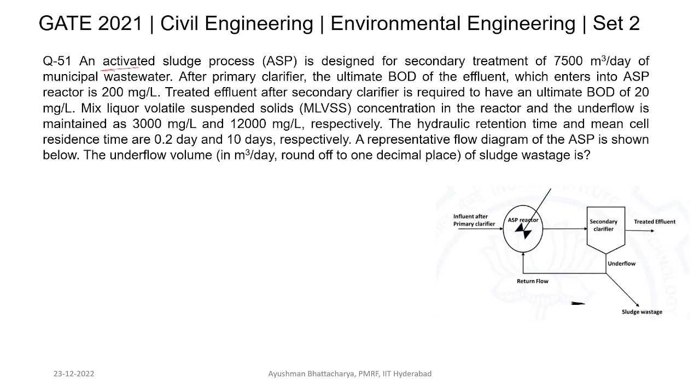In this session, our first question will be from GATE 2021, set 2. The question says: an activated sludge process designed for secondary treatment of 7,500 meter cube per day of municipal wastewater. After the primary clarifier, the ultimate BOD of the effluent which enters the ASP is 200 milligram per liter.

The treated effluent from the secondary clarifier is required to have an ultimate BOD of 20 milligram per liter. Mixed liquor volatile suspended solid concentration in the reactor and the underflow is maintained as 3000 mg per liter and 12,000 mg per liter. The hydraulic retention time and mean cell residence time are 0.2 day and 10 days respectively. The representative flow diagram of the ASP is shown below.

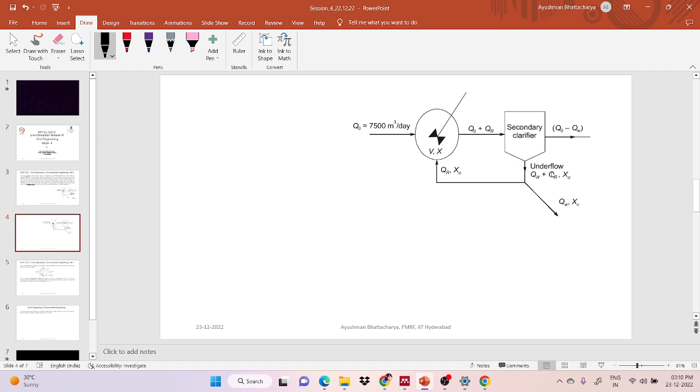The underflow volume of sludge wastage is asked here. So we will first make the figure: 7,500 meter cube of water is going to the aeration tank, then to the secondary clarifier. For underflow, you have to calculate QW plus QR, so both we have to calculate.

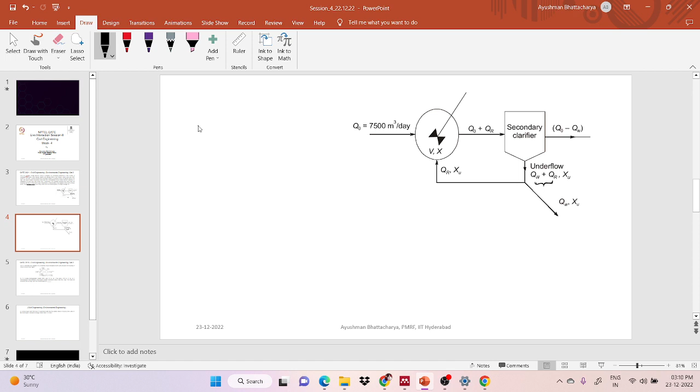Let's start with the question data. Mixed liquor volatile suspended solid in the reactor and the underflow is 3000 and 12,000 milligram per liter. So I can write X equals 3000 milligram per liter, and Xu at underflow equals 12,000 milligram per liter.

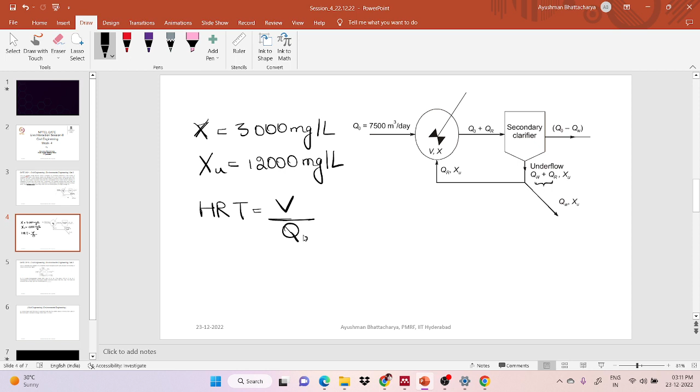Now we will calculate the HRT. We know the formula V by Q naught. In the question they have mentioned hydraulic retention time and mean cell residence time as 0.2 day and 10 days, so HRT is 0.2 day.

0.2 day equals volume of the tank by Q naught. The Q naught flow, total flow, they have given as 7,500 meter cube per day, and HRT is also in days. So we get the volume as 1500 meter cube.

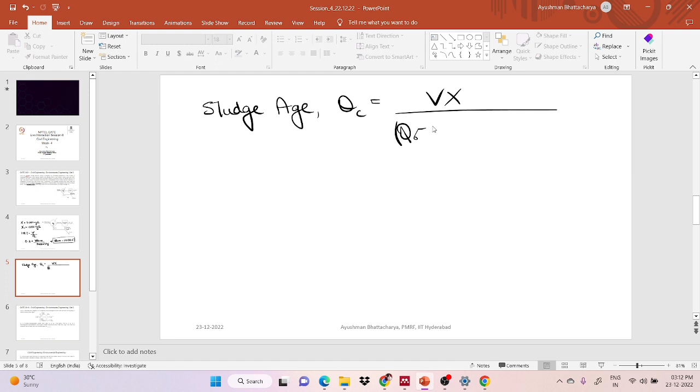Now, once we got the volume, we have to calculate the sludge age. Sludge age formula is theta c equals Vx divided by (Q naught minus QW)Xe plus QWXu.

Volume we just calculated as 1500 meter cube. MLSS concentration they have mentioned as 3000 milligram per liter. Now Q naught minus QW.

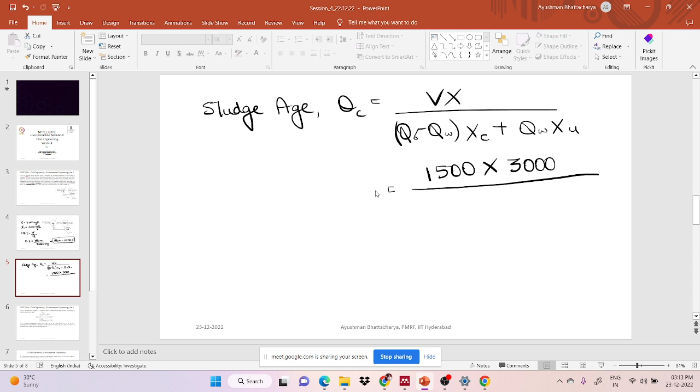So sludge age - what is it? Basically mean cell residence time, MCRT, given as 10 days. Sludge age or MCRT, these words are basically the same, so mean cell residence time or sludge age, both are same - 10 days.

Now Q naught minus QW and the MLSS concentration in the effluent - this they have not given in the question. So in the treated effluent we will assume it is negligible compared to this ASP, so basically it will come as QWXU, considering Xe is near to 0.

From here, QW you will get: 1500 into 3000 by QW into, so Xu they have mentioned as 12,000. From here we will get the value of QW. If you calculate, you get QW as 37.5.

So QW equals 10 divided by 1500... so QW basically equals 1500 into 3000 divided by 10 into 12,000. So you will get QW as 37.5 meter cube per day.

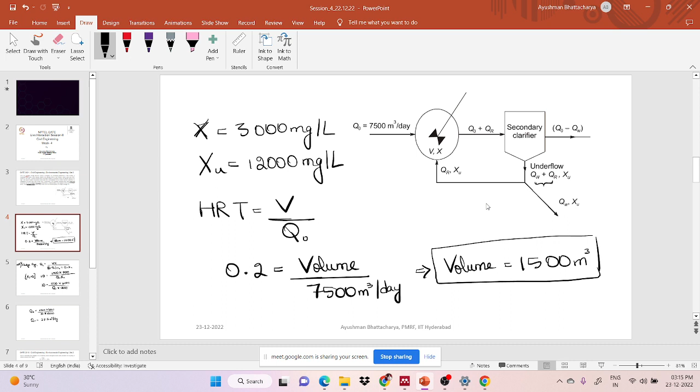So this is QW, but they have asked for the underflow, so you need to calculate QR as well. For QR, we use QR by Q naught equals X upon (Xu minus X). From here, if you substitute the value, QR equals X. MLSS concentration we know, X they have given us.

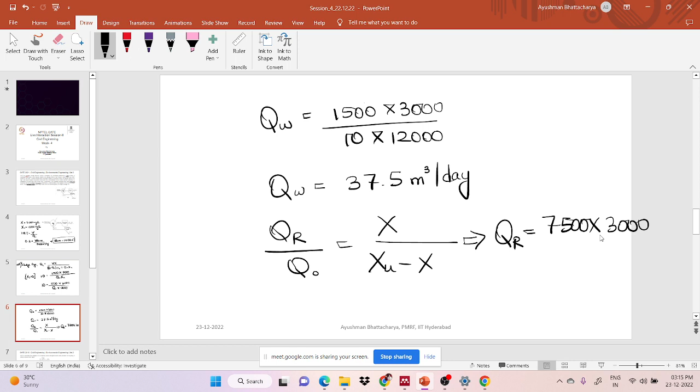So X, they have given us 3000. So Q naught is basically ours. 7,500 Q naught, this is 7,500 into 3,000 divided by 9,000. If you calculate, you will get 2,500 meter cube per day.

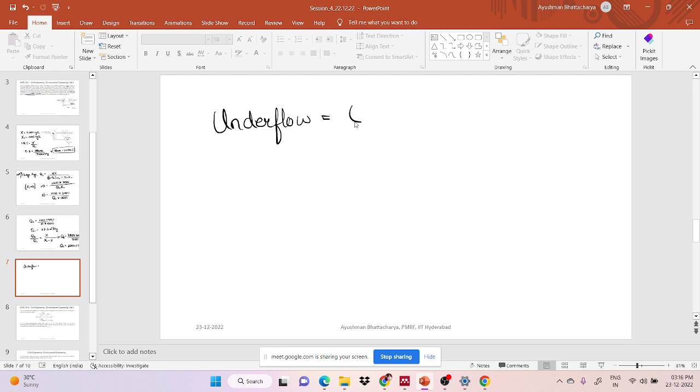This is QR. Now for the underflow rate, you have to add both of this. So underflow equals QW plus QR, that is 2,500 plus QW which was 37.5. So we got the value of 2,537.5 meter cube per day.

So is it clear? Since one person again joined, I will just again discuss this question. So basically in this question they are asking...

Activated sludge process has been designed for the secondary treatment of this much amount of effluent wastewater. After primary clarifier, the ultimate BOD in the effluent which enters into the ASP is 200 milligram per liter. The treated effluent after secondary clarifier is required to have an ultimate BOD of 20 milligram. The mixed liquor suspended solid concentration in the reactor and the underflow is maintained as 3000 milligram per liter and 12,000 milligram per liter respectively. The hydraulic retention time and mean cell residence time are also mentioned.

Now they are asking the underflow volume of the sludge wastage. So if we look at the figure, the underflow basically comprises of QW plus QR. Therefore we have to calculate both QW and QR. For calculating QW and QR, we have to first calculate the volume of this aeration tank.

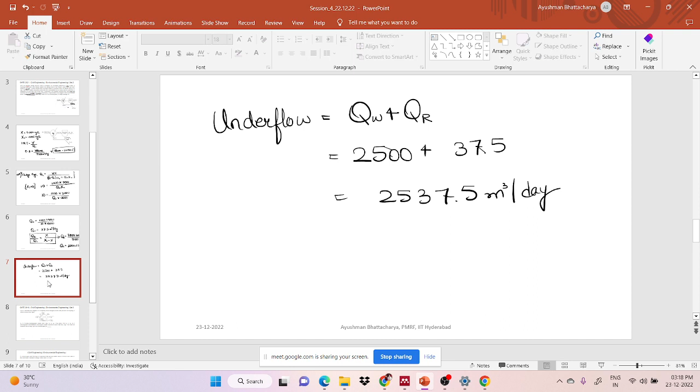Sir, actually in the official GATE solution it was given as 37 to 38. That is the answer given. Underflow volume you are talking, 37 to 38? Yeah, in the official site actually I had seen that and I had written it on the previous question. It was written 37 to 38. You just check, because underflow volume, I had solved it as 37.5, that's why I checked it.

37.5 is the QW. See, QW is 37.5. Yes sir, but underflow when you talk, it's QW plus QR, right? Yes, the recycle which is going here, then again it will add, right? So that's why, if you calculate only this, then see in the question also they have mentioned that this is the underflow. Understood? Yes sir, so I think you are calculating only QW here. So that's why you are telling 37.5 meter cube per day. But if you use the logic of mass balance, it will be QW plus QR.

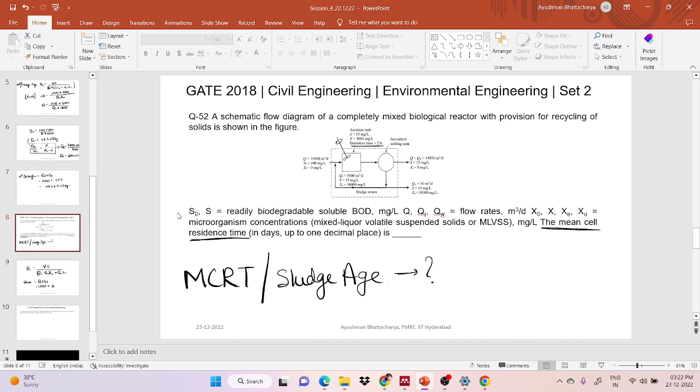So Q is 15,000 and TD is 2 hours. Since Q was in per day and TD is 2 hours, we have to divide by 24 to make it per day. So the value comes out to be 1250 meter cube. So the volume of the tank came out to be 1250 meter cube.

Now theta C, if we have to calculate - one more catch: Q in the effluent, XE, they have mentioned it as 0. So basically this whole term will become 0, because microorganism in the effluent is near to 0, as mentioned.

So theta C will come out to be Vx divided by QWXU. If you calculate, so 1250 is the volume we just calculated, then X is 3000 as mentioned.

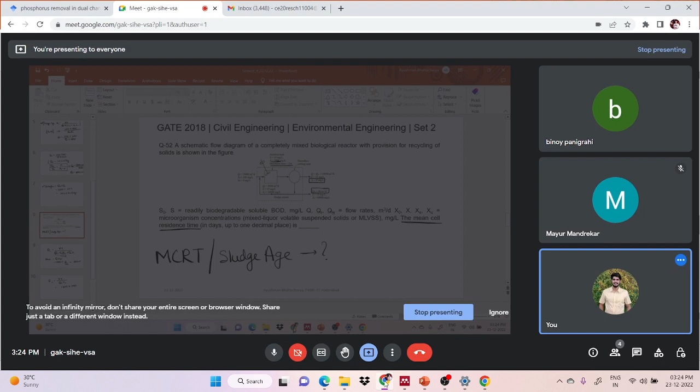Now we have the QW. They have mentioned QW as 50. Here QW refers to the one which is getting out. So QW is 50 and XU is around 10,000.

So you will get sludge age as 7.5 days once you solve this. So this was the question of sludge age, and you got 7.5 days.

Now, let me explain this again. They have given one flow diagram, mentioning everything regarding the inflow, outflow, how the substrate concentration is varying, and how the MLSS concentration is varying. So now they have asked for the mean cell residence time.

Whenever they ask about the mean cell residence time, you should know this formula. Once you know this formula, we calculate the volume of the tank using the flow and the detention time mentioned in the question. Knowing the volume, we calculated the sludge or mean cell retention time using the data given in the question.

And we considered this as zero because of XE - you can say they have considered it as zero here. That is the reason we considered it zero.

Now this is one of the practice questions. A mixed liquor with 2000 milligram per liter of suspended solid has a settled volume of 200 milliliter from a liter of the mixed liquid. Calculate this sludge volume index. Is it safe?

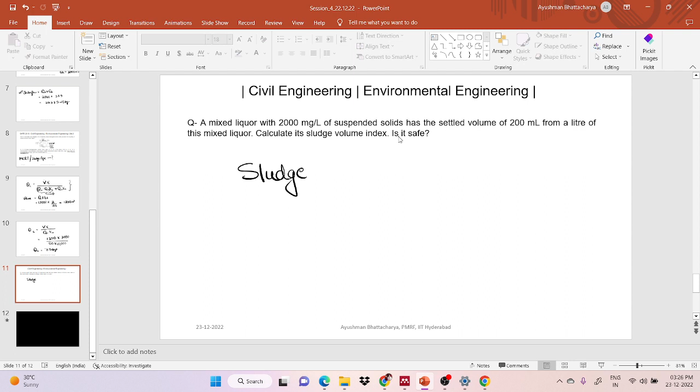So sludge volume index we have to calculate, SVI, and then they are asking whether it is safe or not. Sludge volume index is equals to VOB by XOB into 1000.

So VOB basically here is 200 milliliter and X is 2000 milligram per liter. So you have to substitute this 2000 milligram per liter and into 1000. So here you will get it as around 100 milligram per liter.

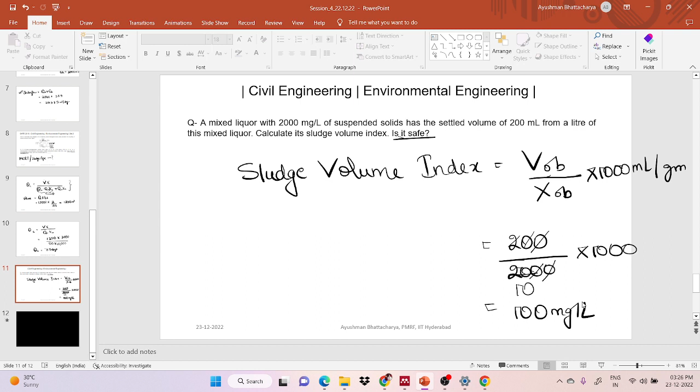So the next question, is it safe? Yes, it is safe. Reason being the value of SVI ranges from 80 to 150 milliliter per gram - since it is within this range, yes, it is safe.

So this is all about today's class. Before leaving, I will discuss a few more design parameters so that you will be well acquainted with some words like sludge volume index, HRT, substrate specific growth utilization rate. Because in the question they can ask you one or the other way, so you should know what these parameters mean.

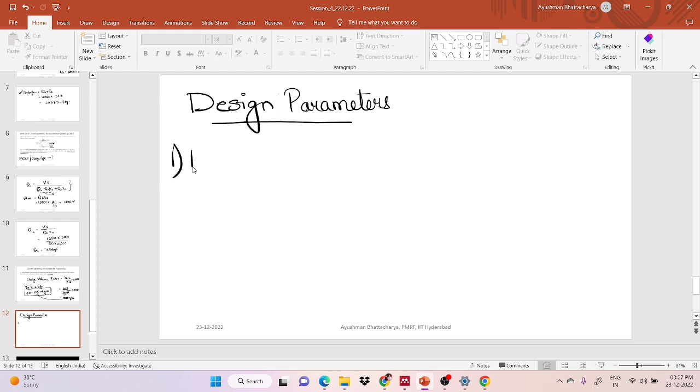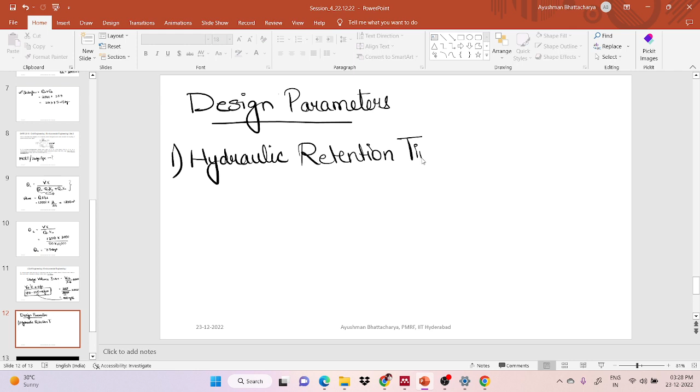So the first design parameter is hydraulic retention time, or aeration time, also called detention time.

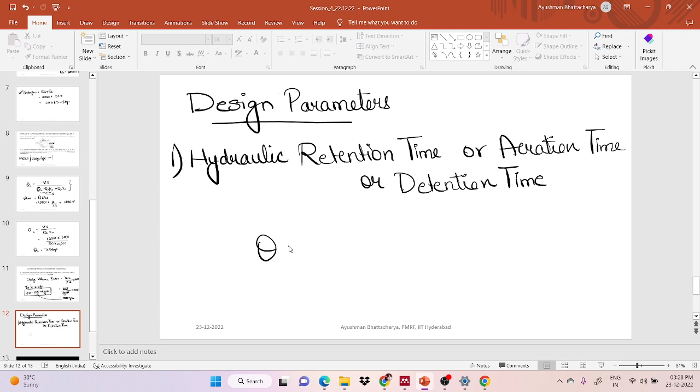So all these words mean the same. The amount of time the liquid remains in the tank, we call it hydraulic retention time. Its formula is denoted by theta, which is volume of tank divided by rate of flow in the tank. So V by Q basically.

So the first design factor is hydraulic retention time. We can also call it aeration time or detention time. All these things are the same. Second thing is volumetric...

Volumetric BOD loading, or you can call it organic loading rate. Not only are these words important for GATE, they are important for any interview you will be giving. They can ask what is volumetric BOD loading or organic loading rate.

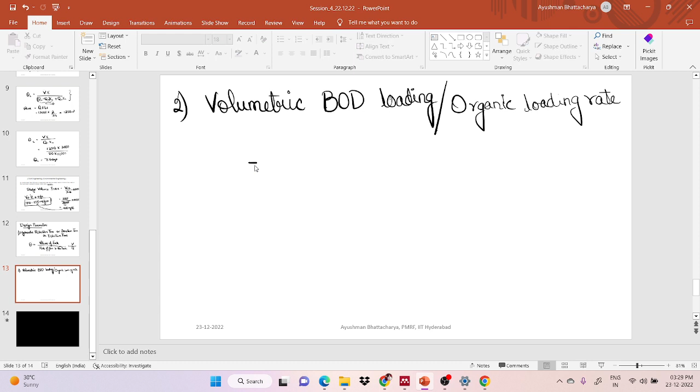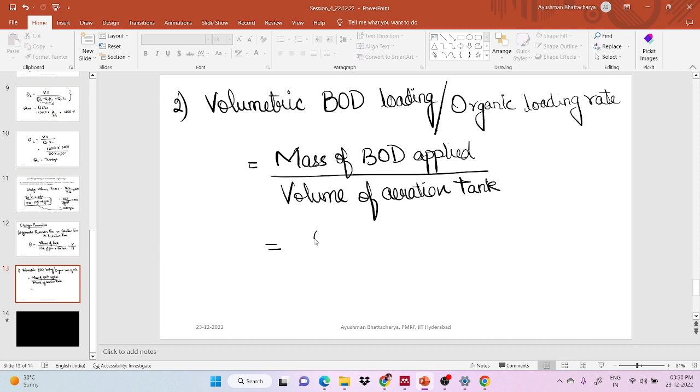So this basically means mass of BOD applied per unit volume of aeration tank. So you can write it as Q S naught by V, and its unit is kg per day per meter cube. Q is the flow rate, S naught is the influent BOD, and V is the volume of the tank. So this is the second thing.

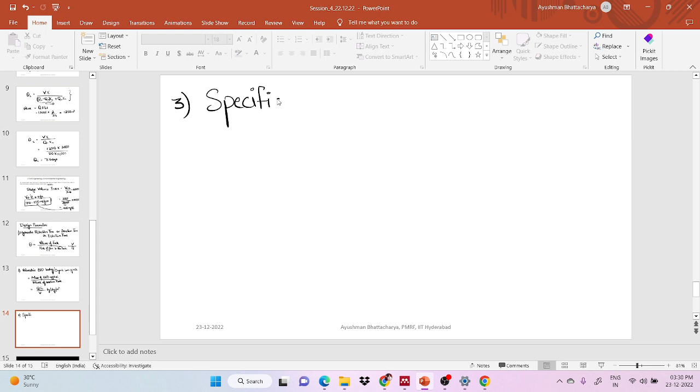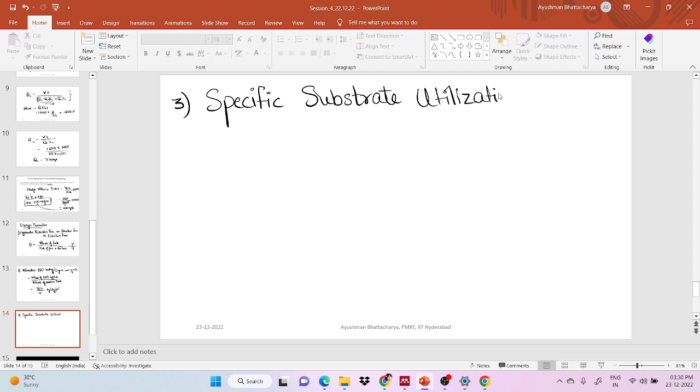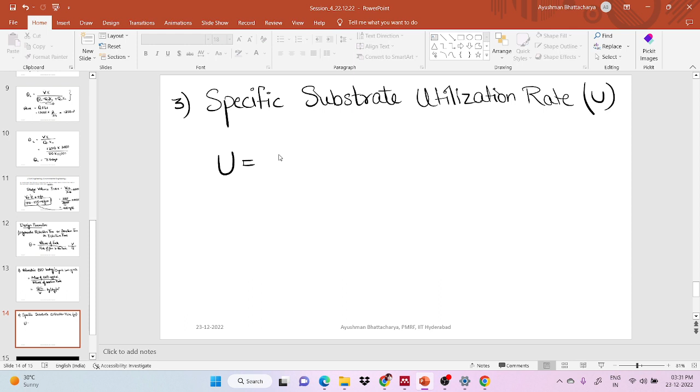Now the third thing is specific substrate utilization rate. We denote it with U. Specific substrate utilization rate U equals Q S naught minus... wait, it's better if I write it. Just remember Q times S naught minus S by V X.

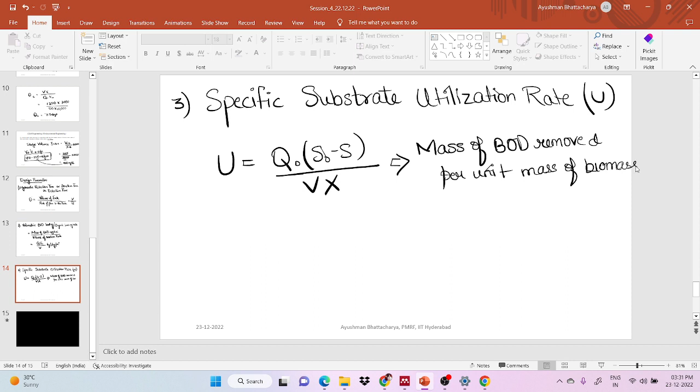So this basically means mass of BOD removed per unit mass of biomass in the aeration tank.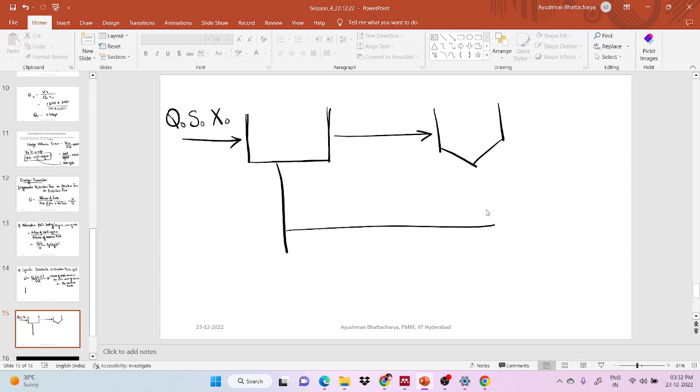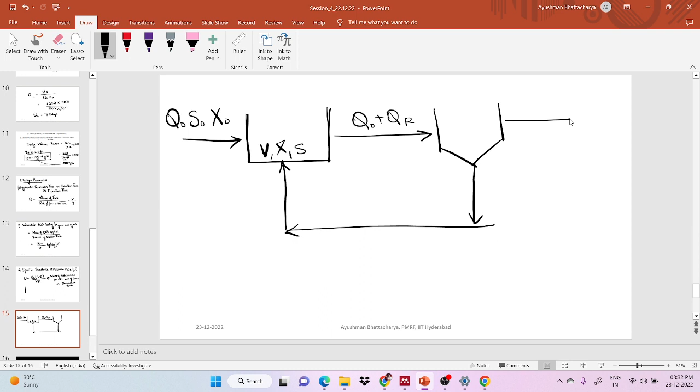So here we have V, X, S. Here Q naught plus QR. It is Q naught minus QW, XE, S. Here it is QU, which is equivalent to QW plus QR. I think you will all be well acquainted with this figure. So this is QW XU, and here it is QR XU S. When I call substrate, here it is XS. From this figure you can relate these things.

Q S naught is the mass of BOD applied - Q is the flow and S naught is going in - so mass of BOD applied in the aeration tank. Similarly, specific substrate utilization rate is mass of BOD removed per unit mass of biomass in the aeration tank.

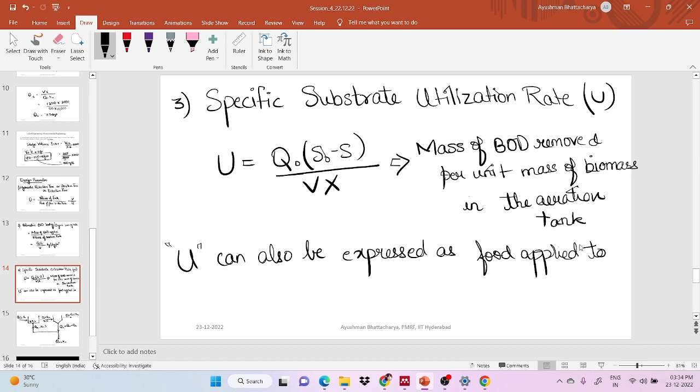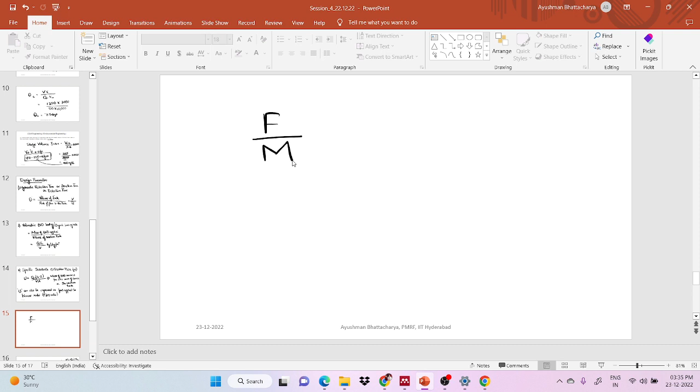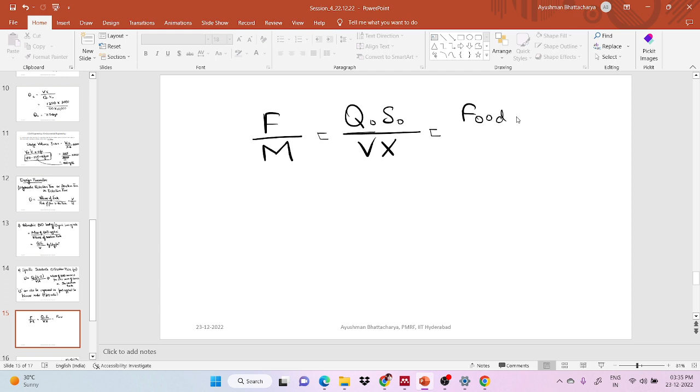Now the second thing I want to tell you is this - U can also be expressed as food applied to biomass ratio, F by M ratio. F by M ratio indicates Q naught S naught upon Vx, which equals food applied upon mass of MLSS.

So lower the F by M ratio, greater will be the removal of BOD. Lower the F by M ratio, greater will be the removal of BOD.

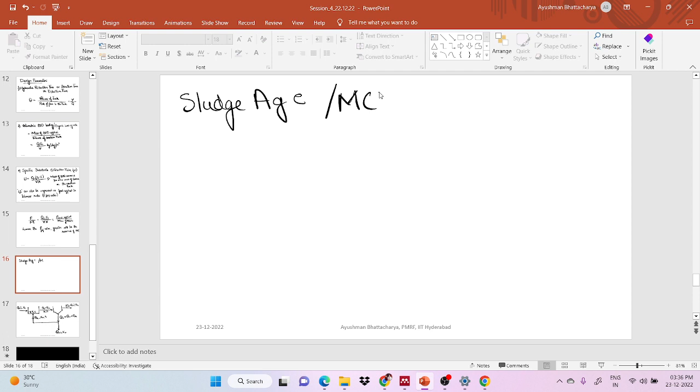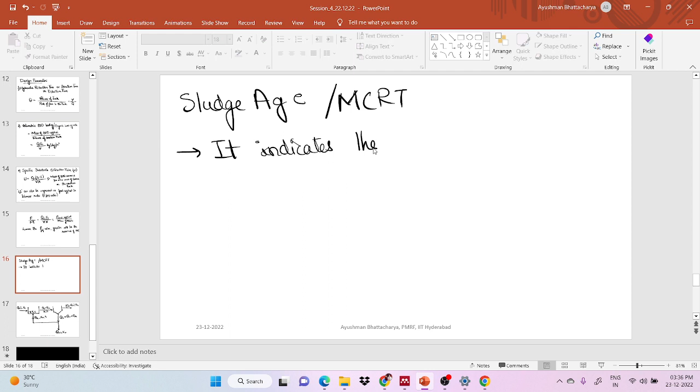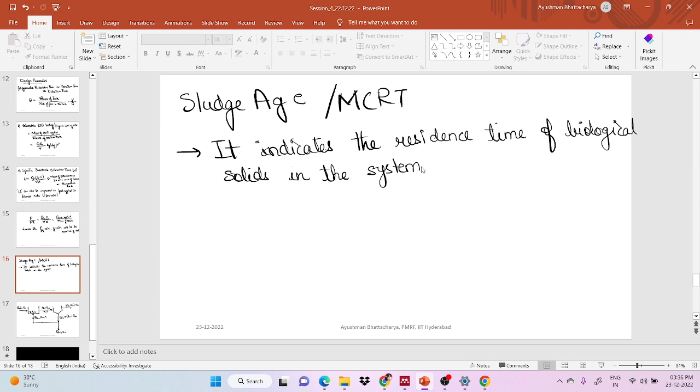Now the second thing is sludge age. It indicates sludge age, or you can call it mean cell residence time. It indicates the residence time of biological solids in the system. Or else, you can define it as the average time for which biomass remains in the system.

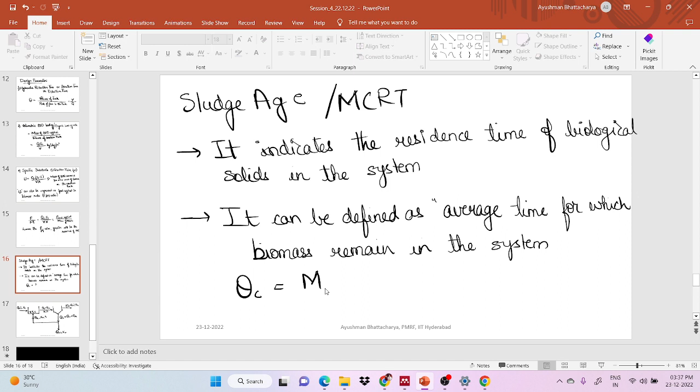So here you can say theta c equals mass of MLSS in the aeration tank divided by mass of MLSS leaving the system per day.

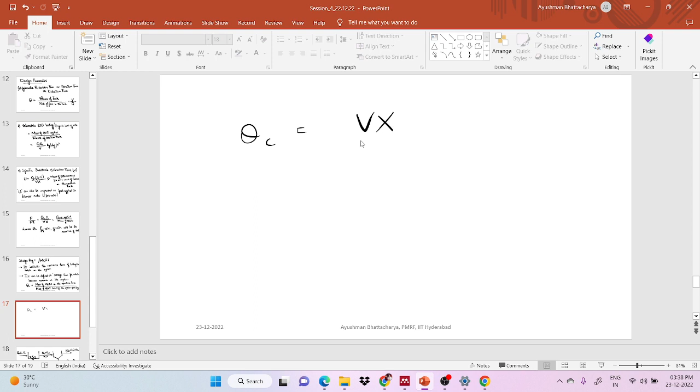Sorry, MLVSS. Mass of MLVSS in the aeration tank, mass of MLVSS leaving the system per day. So here theta c is equal to Vx by Q naught minus QW Xe plus QW XU.

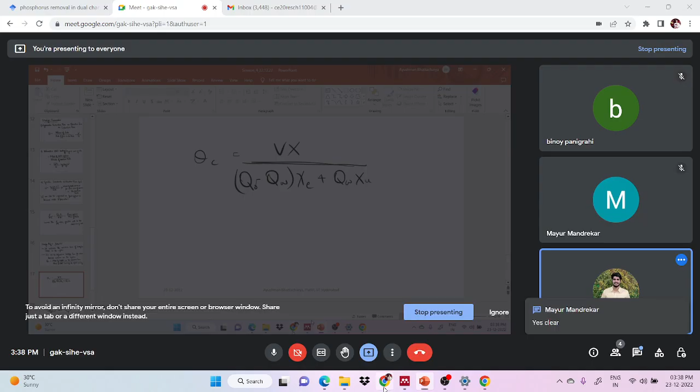Till now, is it clear what I am telling? Am I audible? Okay, so this is what we call as theta c, and there is one more term. These are very important terms which either in the interview or in the GATE exam can come up, so it is very important that you are well acquainted with all these terms.

So next thing I will talk about is sludge volume index, SVI. It is defined as volume occupied in ml by 1 gram of solid in the mixed liquor after settling for 30 minutes.

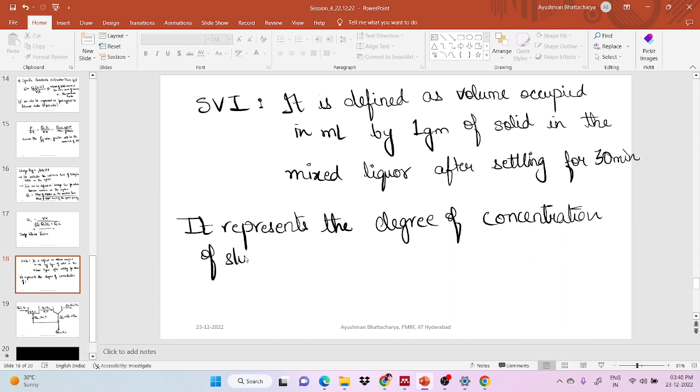It represents the degree of concentration of sludge in the system, and hence decides the rate of recycling of sludge required to maintain desired MLVSS and food to microorganism ratio in the aeration tank, to achieve required degree of removal.

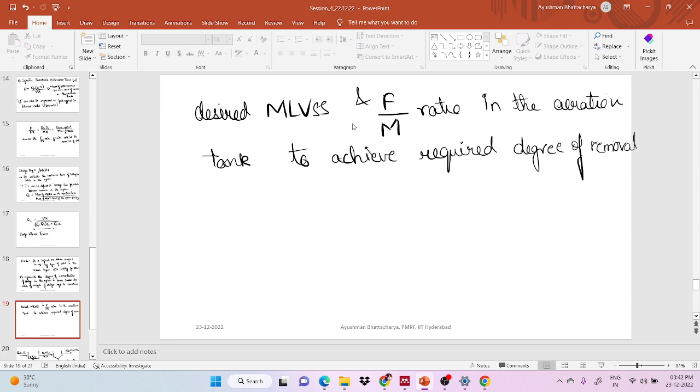Always remember SVI remains between 80 to 150 milliliter per gram. In some textbooks, they refer to 50 to 150 milliliter per gram. So it should be between 80 to 150 milliliter per gram. This will ensure there is sufficient settleability of sludge.

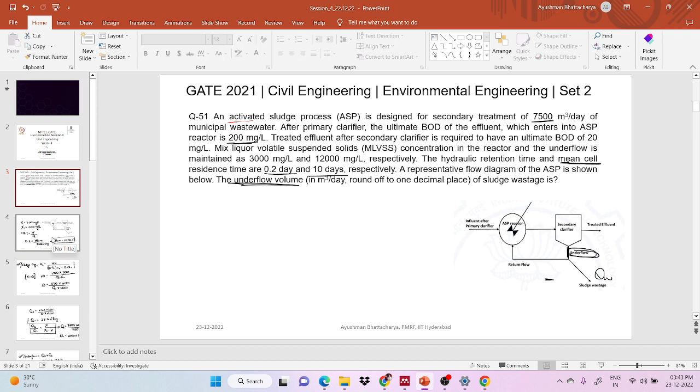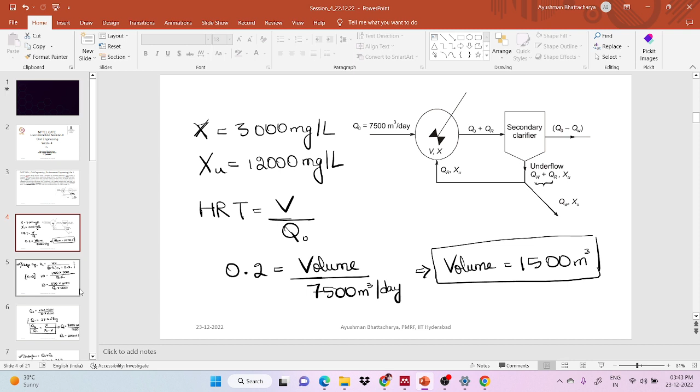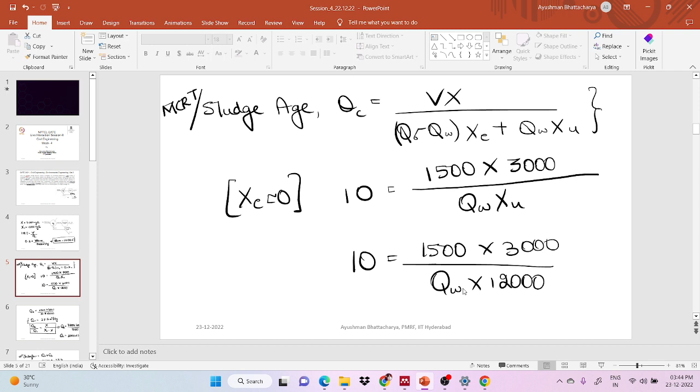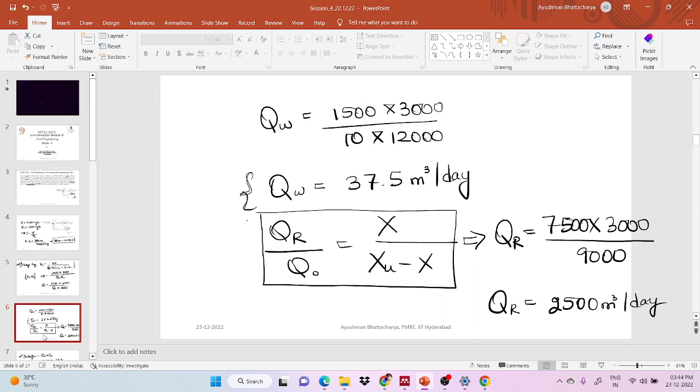Using the formula of hydraulic retention time, we calculated the volume. After getting the volume, we used the formula of sludge age, since sludge age or MCRT was given in the question as 10 days. Using that we calculated the value of QW. Then we applied this formula from where we calculated the rate of recycling of sludge water, wastewater, QR. Then for the underflow it is QW plus QR, so we got 2500 plus 37.5, total 2537.5 meter cube per day. So this is the total underflow.

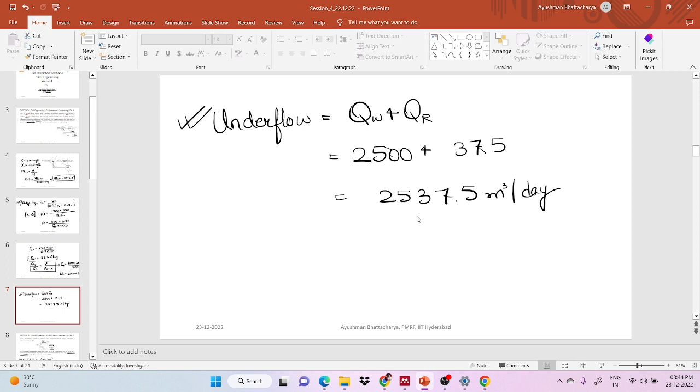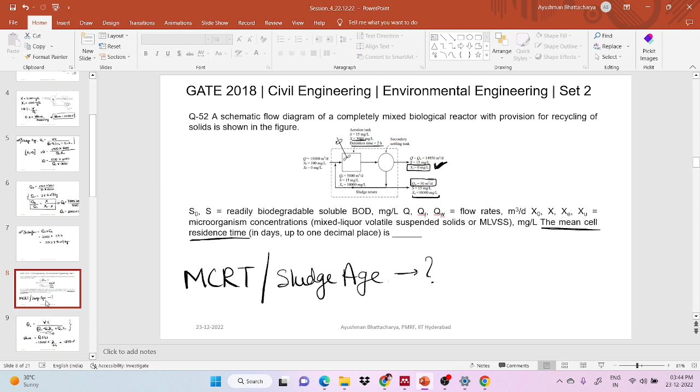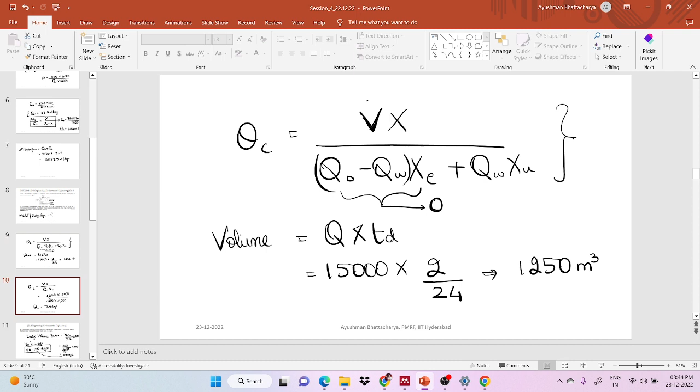In the next question, we calculated the sludge age, again asking mean cell residence time. MCRT or sludge age are both the same. So we again used this formula, since Xe is zero in the effluent, it is zero MLSS concentration, so that whole term became zero. The remaining term is Vx by QW XU. For applying this term, we need the volume, so we multiplied total inflow into the hydraulic detention time and got 1250 meter cube. Using that, we calculated the sludge age and it came out to be 7.5 days.

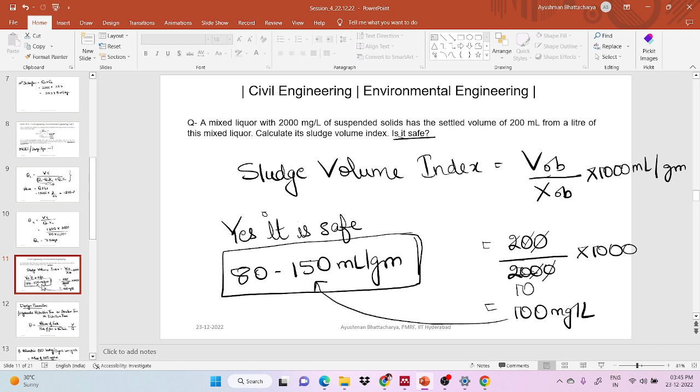In the second question, we calculated the sludge volume index, and at the end they mentioned whether it is safe or not. Using the formula VOB by XOB into 1000 milliliter per gram, we got 100 milliliter per gram. Since it is within the safe limit of 80 to 150, we can say yes, it is safe.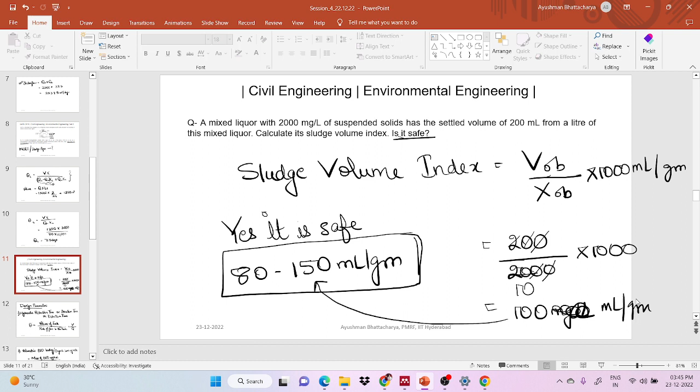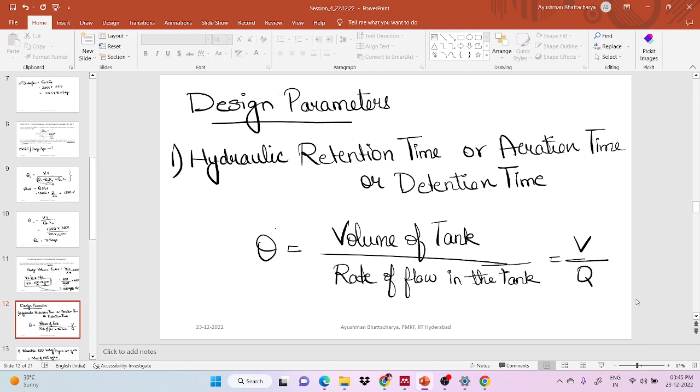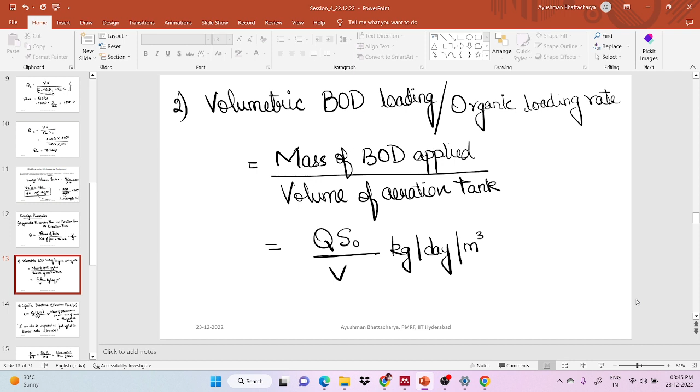Now coming to the design parameters, we first understood that hydraulic retention time, aeration time, and detention time are all the same. So retention time equals volume of the tank by rate of flow in the tank, V by Q. Now volumetric BOD loading or organic loading rate, these both terms are the same and mean mass of BOD applied per unit volume of the aeration tank. Now, specific substrate utilization rate, we denote it with U.

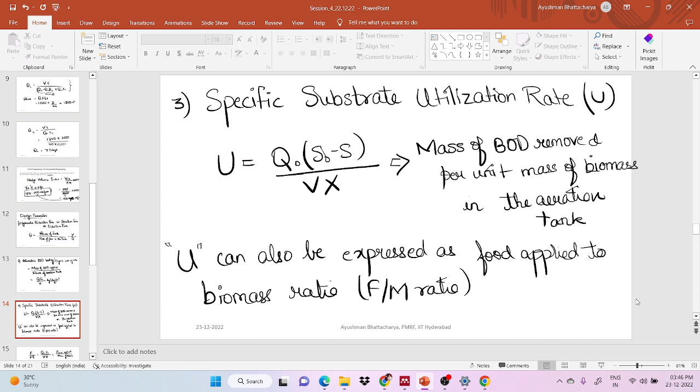U means mass of BOD removed per unit mass of biomass in the aeration tank, and U can be expressed as food applied to the biomass ratio F by M. So F by M is equal to food applied by mass of MLVSS. Lower the F by M ratio, greater will be the removal of BOD.

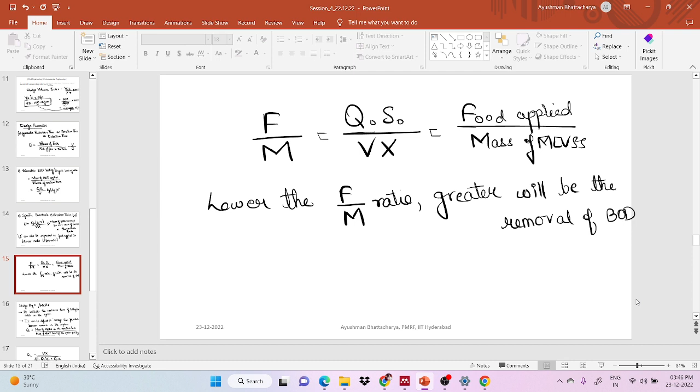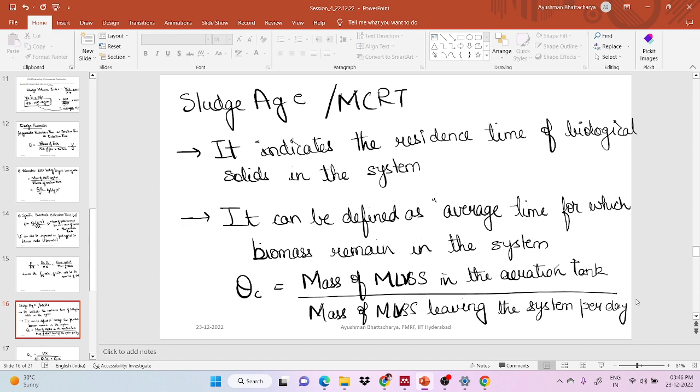Now we studied sludge age. Sludge age, or mean cell residence time, indicates the residence time of biological solids in the system. It is the average time for which biomass remains in the system, given by the formula: mass of MLVSS in the aeration tank divided by mass of MLVSS leaving the system per day. Numerically, Vx by Q naught minus QW into XE plus QWXU. This is theta c. Then we discussed sludge volume index.

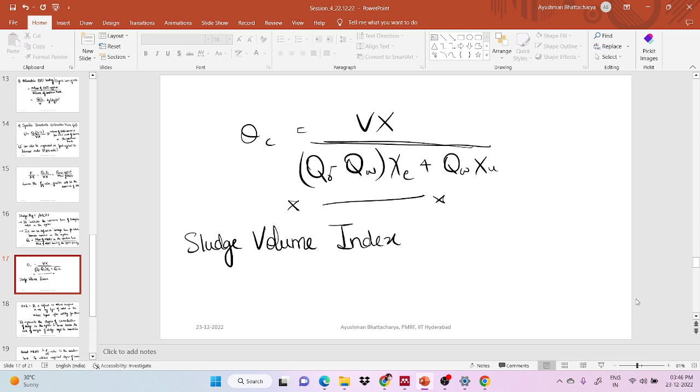Sludge volume index basically defines the volume occupied in ml by 1 gram of solid in the mixed liquor after settling for 30 minutes. It represents the degree of concentration of sludge in the system, and hence decides the rate of recycle of sludge required to maintain the desired MLVSS and F by M ratio in the aeration tank to achieve the required degree of removal. It ranges from 80 to 150 milliliter per gram, which ensures sufficient settleability of sludge.